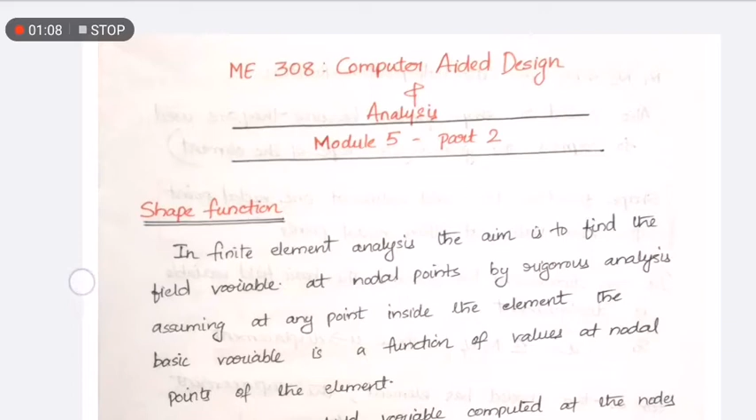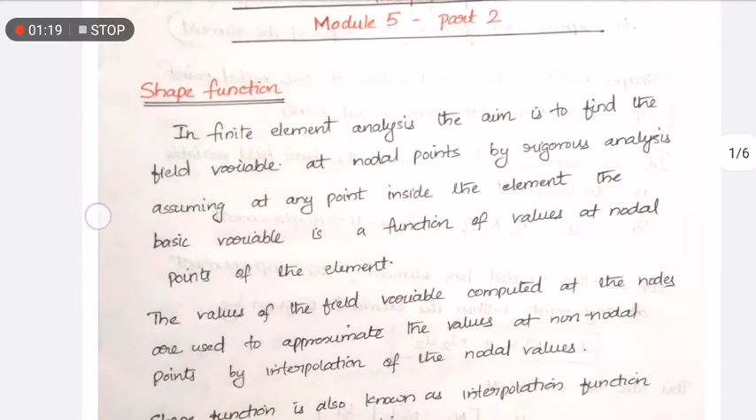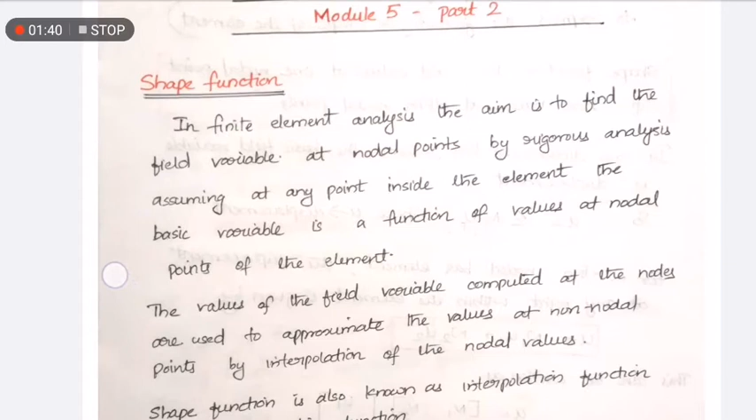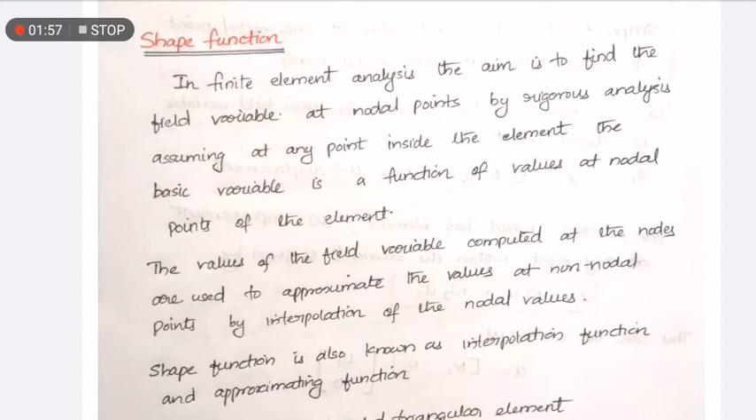Let's see in a formal way what a shape function is. In finite element analysis, the aim is to find the field variable at nodal points by rigorous analysis, assuming that at any point inside the element, the basic variable is a function of the values at the nodal points of the element. That is, the function which relates the field variable at any point within the element to the field variable at the nodal points of the element is called the shape function. In a clearer way, the values of the field variable computed at the nodes are used to approximate values at non-nodal points by interpolation of the nodal values. This function is called the shape function. It is also known as the interpolation function and approximating function.

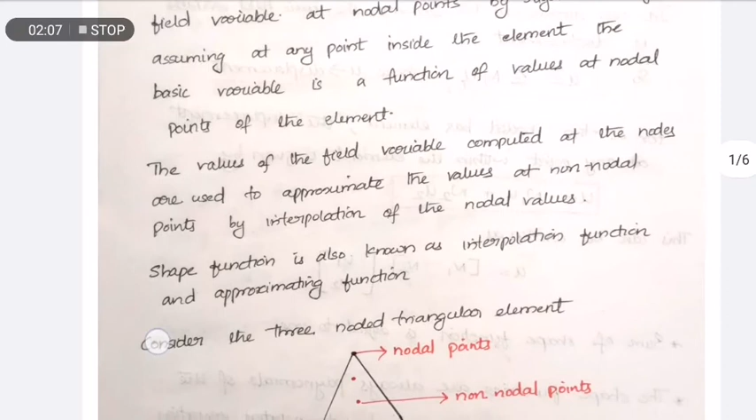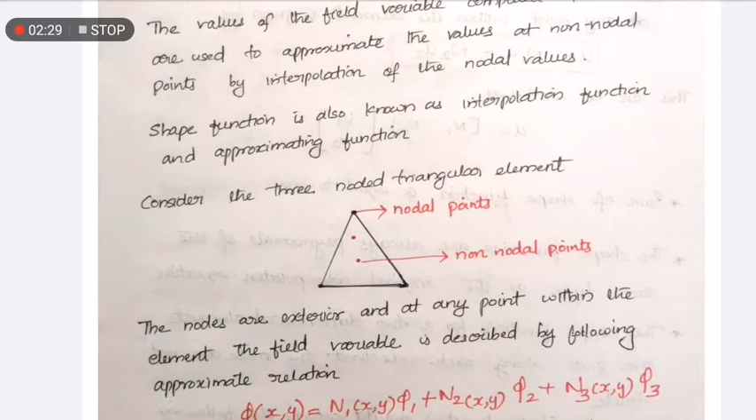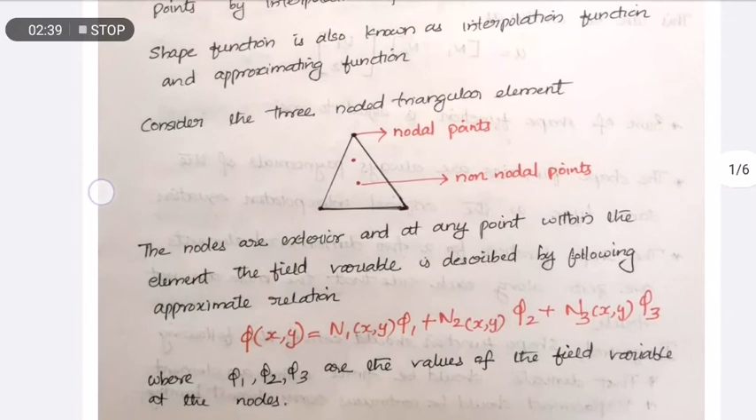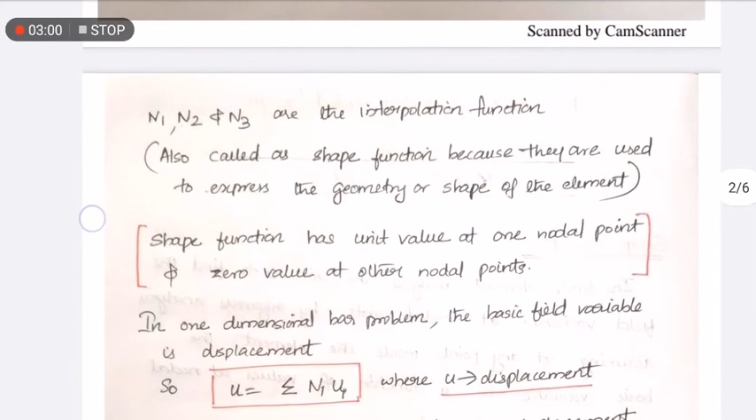Let's see a three-noded triangular element. I have marked the nodal points and non-nodal points. Since it is a triangular element, there are three node points, and there are non-nodal points inside the element. At any point within the element, the field variable is described by the following approximate relation, which is the relation of the shape function: phi(x,y) = N1 phi1 + N2 phi2 + N3 phi3, where phi1, phi2 and phi3 are the values of the field variable at the nodes, and N1, N2, N3 are the interpolation functions. This interpolation function is also called the shape function because it is used to express the geometry or shape of the element.

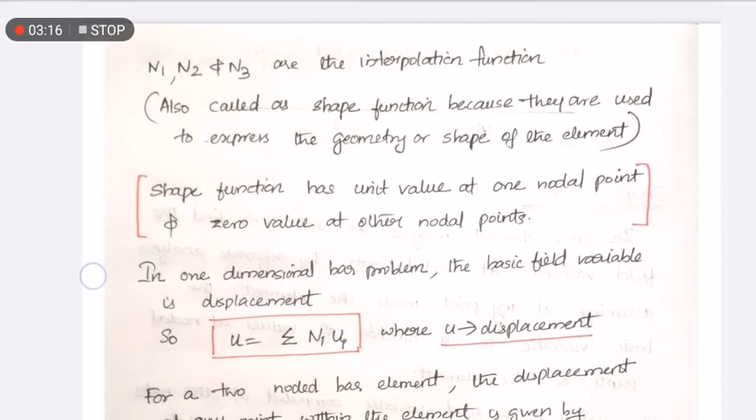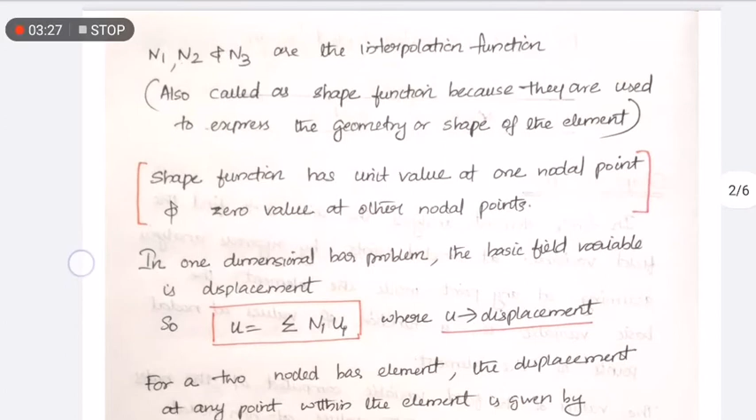One of the main characteristics of the shape function is that it has unit value at one nodal point and zero value at the other nodal points. So a single shape function will have unit value at one nodal point and zero value at the other nodal points.

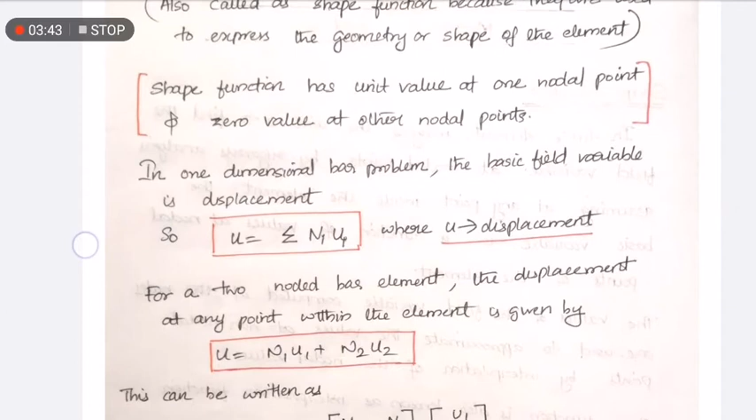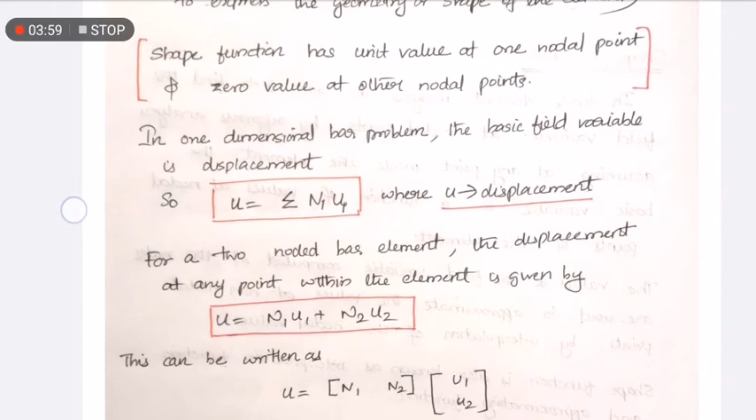When we consider a one-dimensional bar problem, you can write the basic field variable as displacement. When you consider a two-noded bar element, a bar having two nodes, the displacement at any point within the element is given by u = N1 u1 + N2 u2, where N1 and N2 are the shape functions and u1 and u2 are the displacements at the nodes. This can be written in matrix form as u = [N1 N2] {u1 u2}, where one is a row matrix and the other is a column matrix.

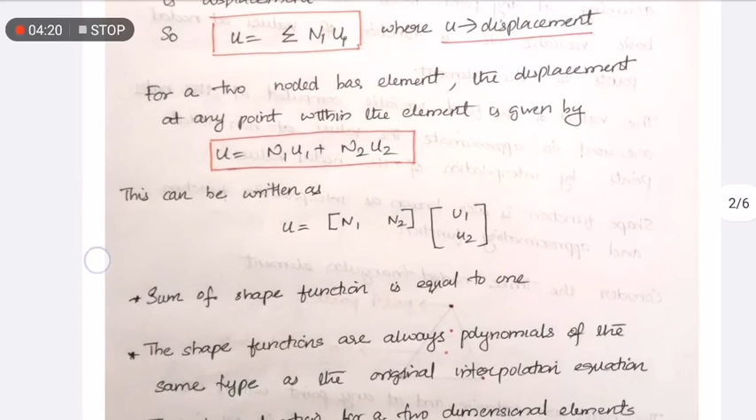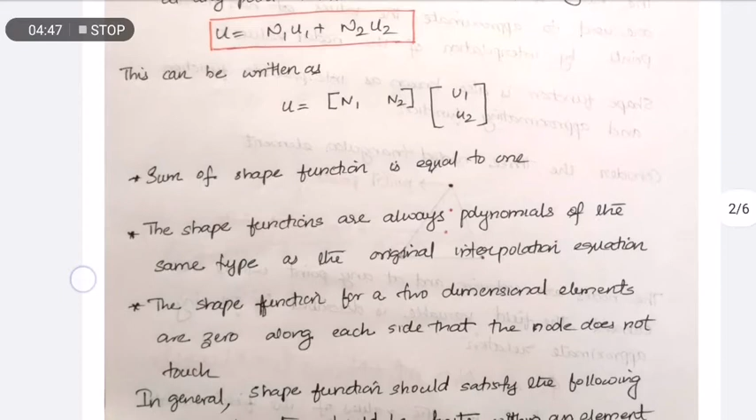Another characteristic of shape functions is that the sum of the shape functions is equal to 1, and the shape functions are always polynomials of the same type as the original interpolation equation. Why polynomials? Polynomials are quite easy for differentiation and integration, and it is easy to formulate and computerize the finite element equations.

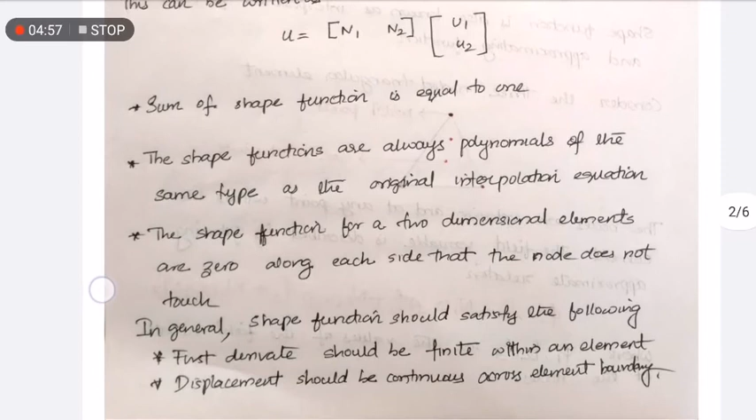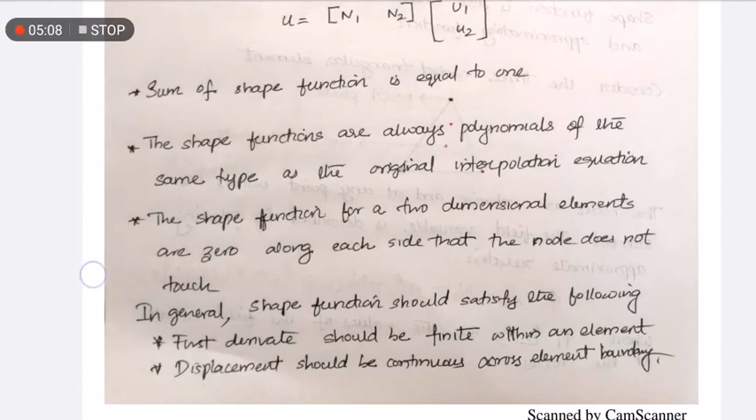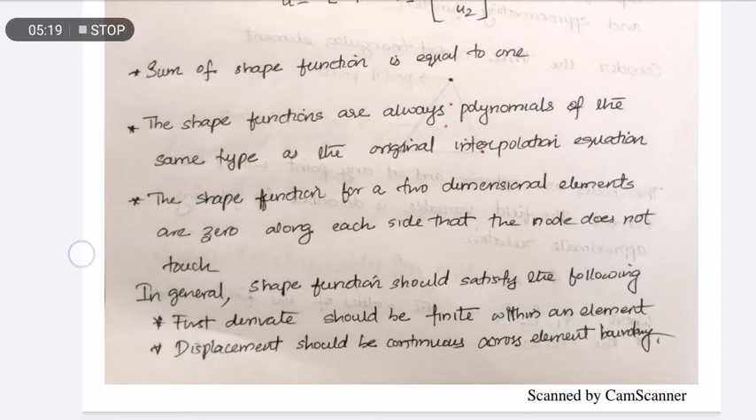In general, shape functions should satisfy the following: the first derivative should be finite within an element, and displacement should be continuous across the element boundary. These are the shape function characteristics. And one more: the shape functions for two-dimensional elements are zero along each side that the node does not touch. So this is the basic of the shape function.

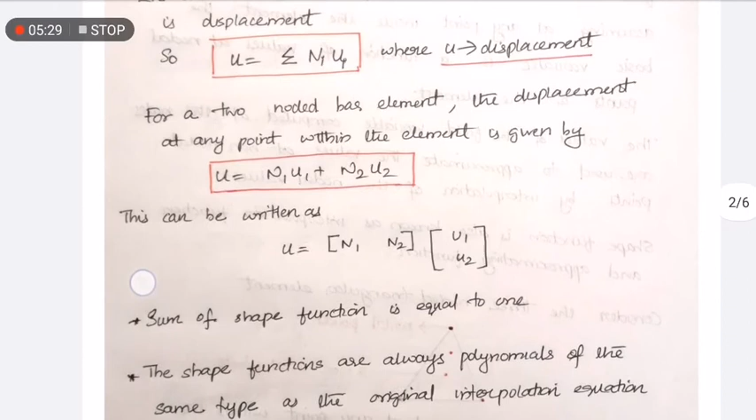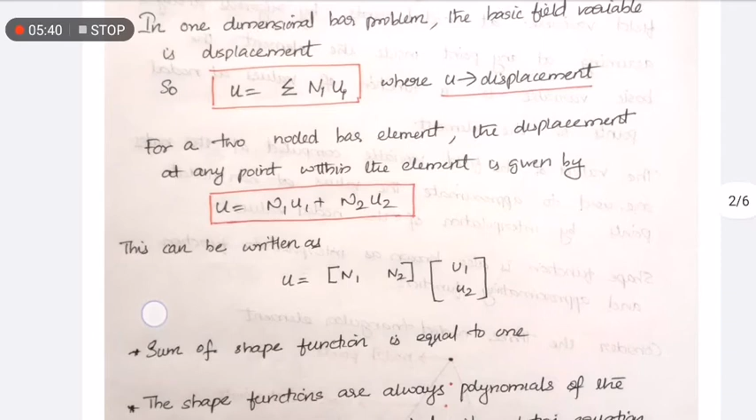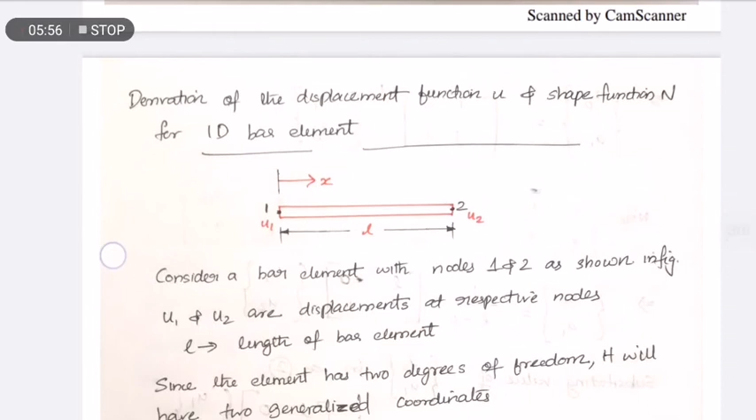For a two-noded bar element, the shape function equation will be u = N1 u1 + N2 u2. Here, for a one-dimensional bar problem, the basic field variable will be displacement. Let's see the derivation of the displacement function u and shape function N for a one-dimensional bar element. You can see a one-dimensional bar element having two nodes 1 and 2, the bar length is L, and u1 and u2 are the respective displacements at nodes 1 and 2.

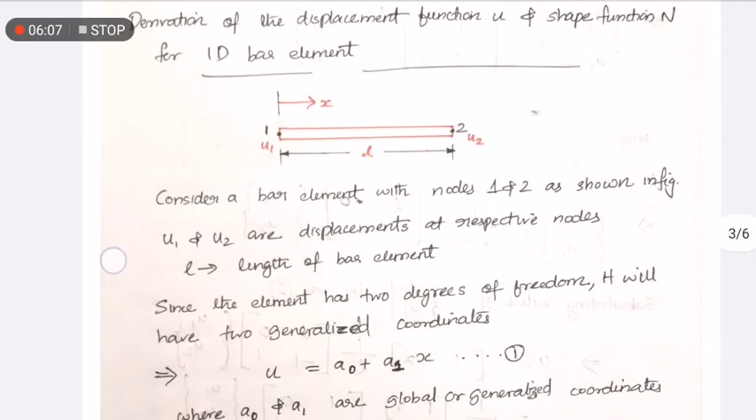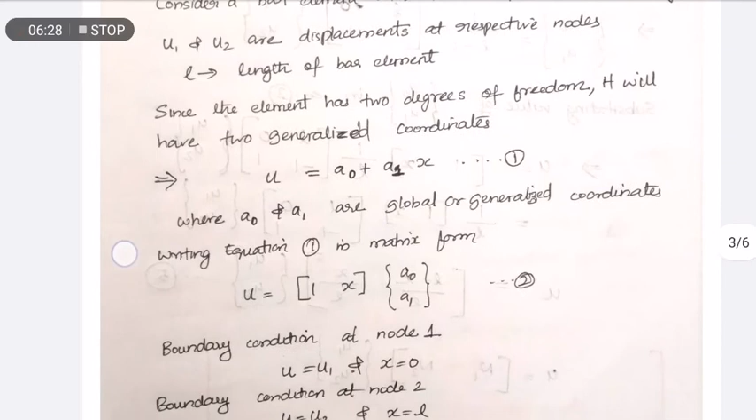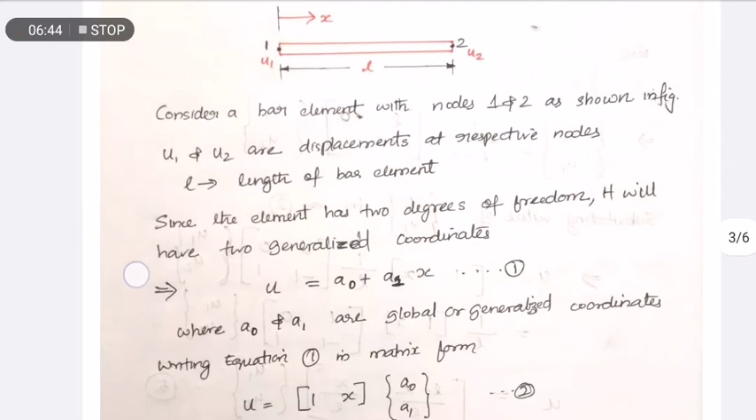Since the element has 2 degrees of freedom, it will have two generalized coordinates. So you can write u = a0 + a1 x generally, where a0 and a1 are the generalized coordinates. We can write it in matrix form: u = [1 x] {a0 a1}. After writing it like that, we will apply the boundary conditions. At node 1, you can see u = u1 and x = 0.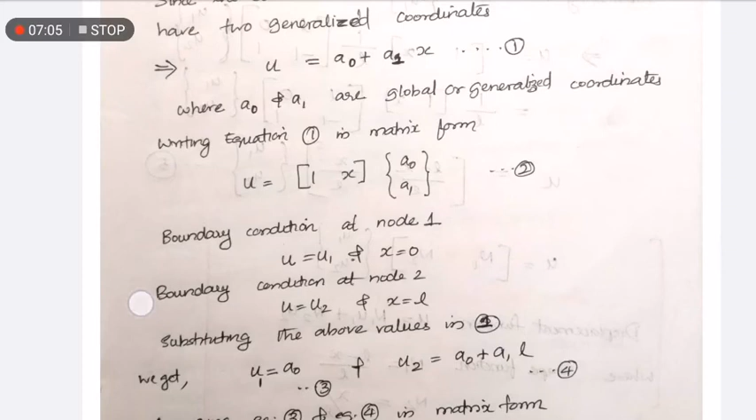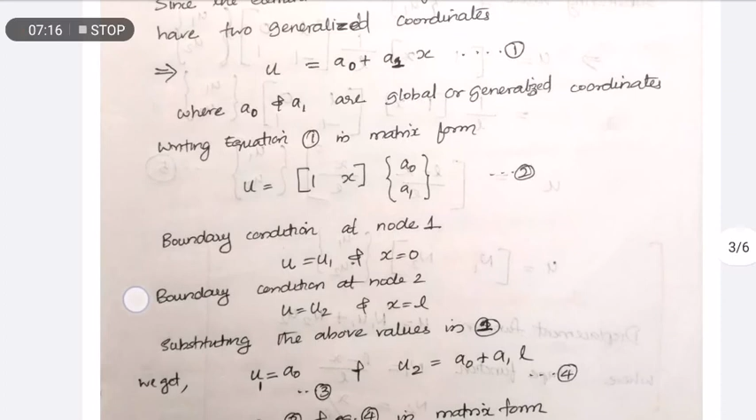At node 2, the boundary condition is that u is equal to u2 at x is equal to L. Why x is equal to L? Because L is the total length of the bar element. So substituting the above values in equation 1, u is equal to a0 plus a1x, we will substitute these boundary conditions and write it in matrix form.

We will write it in a matrix form. u1, u2, a column matrix, is equal to one row matrix into another column matrix: 1 1 0 L is a row matrix and the other is a column matrix. So rearranging for a0, a1, you can get the equation like this. One column matrix and the other one is a row matrix. So the row matrix is inverted. So there is an equation to note.

The inverse of the matrix of a11, a12, a21, a22 elements is equal to 1 by a11 a22 minus a12 a21, into the matrix of a22, minus a12, minus a21, a11. Applying this equation, we can reduce it to the equation a0, a1 is equal to 1 by L, the matrix, into the column matrix. Substituting this value of a0 and a1 in equation 2, that is the matrix form equation 2, and when we reduce that equation,

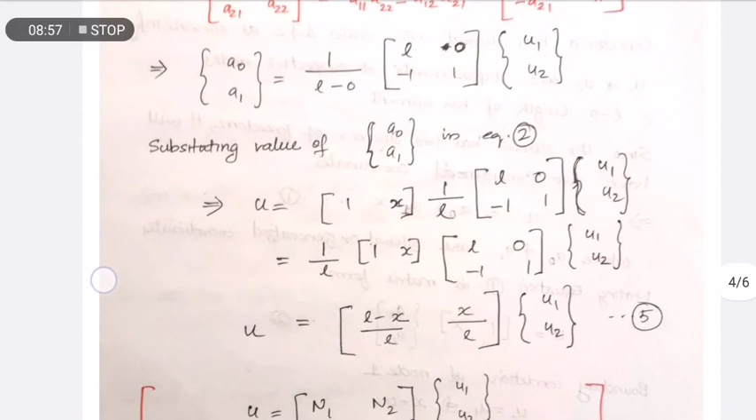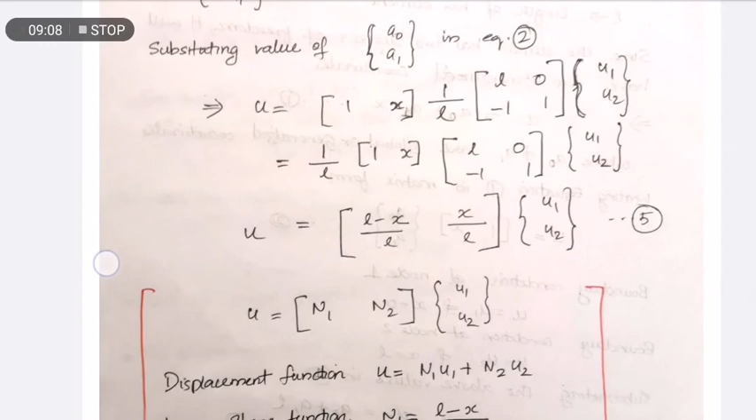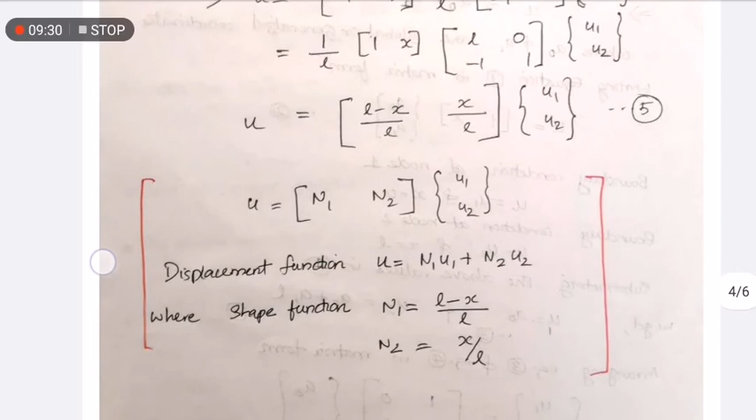we will get u is equal to the matrix with L minus x by L as one element and x by L as the other element, and the other column matrix u1 and u2. So we can say that the displacement function for a two-noded one-dimensional bar element is u is equal to n1 u1 plus n2 u2, where shape function n1 is L minus x by L and n2 is x by L. This is the derivation for the one-dimensional bar element displacement function and shape function.

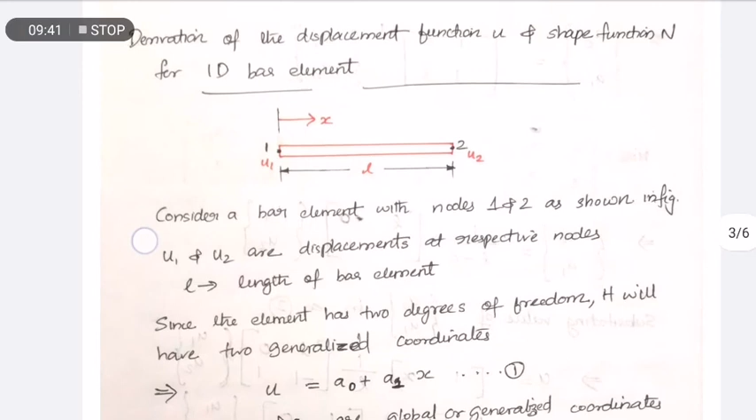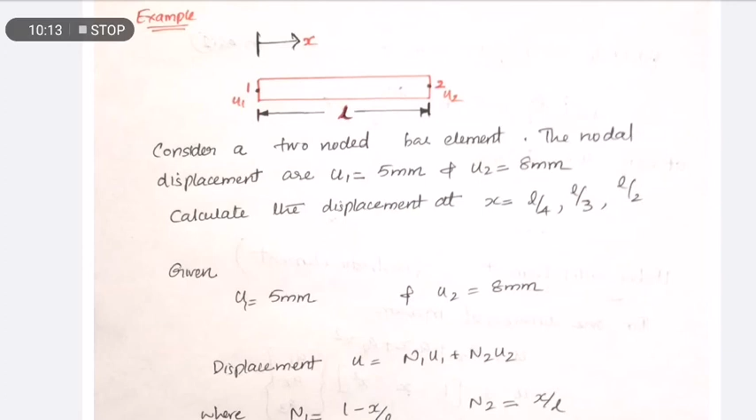So let's see a simple problem related to this shape function. Consider a two-noded bar element. The nodal displacements are u1 is 5 mm and u2 is 8 mm. Calculate the displacement at x is equal to L by 4, L by 3 and L by 2. So there are two nodes 1 and 2. The respective displacements are u1 and u2. The field variables at the nodes are u1 and u2. So we have to find the displacement at non-nodal points L by 4, L by 3, L by 2.

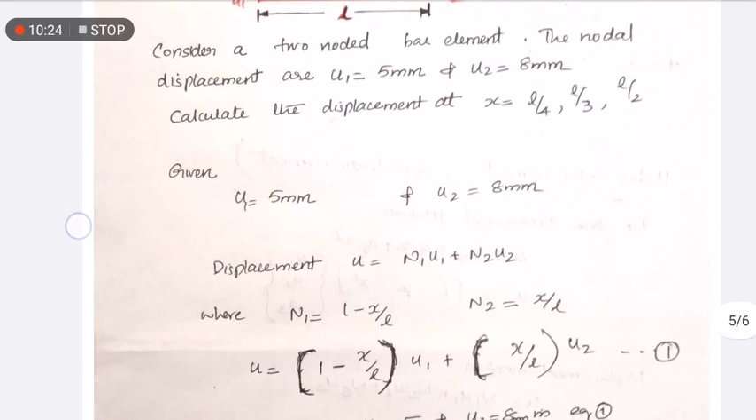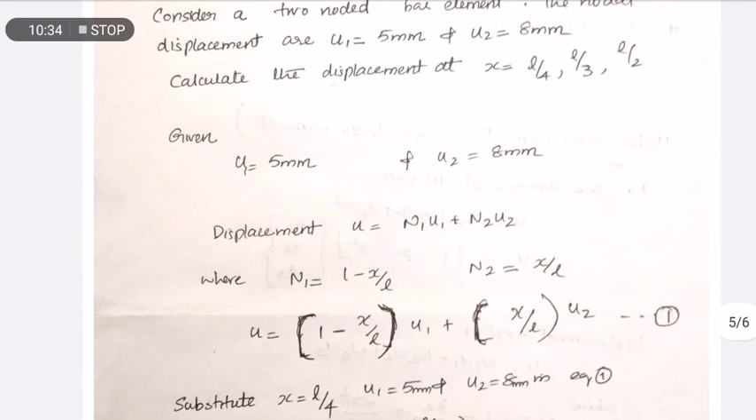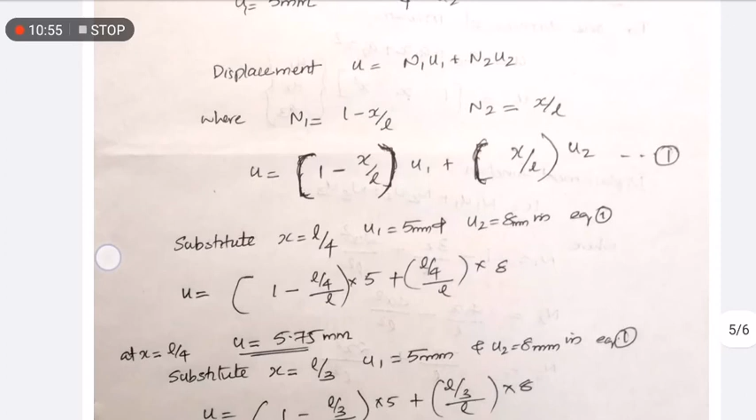Okay. So we will use the equation u is equal to n1 u1 plus n2 u2. And we know that n1 is 1 minus x by L and n2 is x by L. Simply substituting the x value, u1 and u2 values, you will get the answer. For one example, at x is equal to L by 4, we will substitute u1 is equal to 5 and u2 is equal to 8. Then u is equal to n1 u1 plus n2 u2. We will directly get the answer u is equal to 5.75. Similarly for x is equal to L by 3 and x is equal to L by 2. These types of simple problems may be asked for 2 to 3 marks.

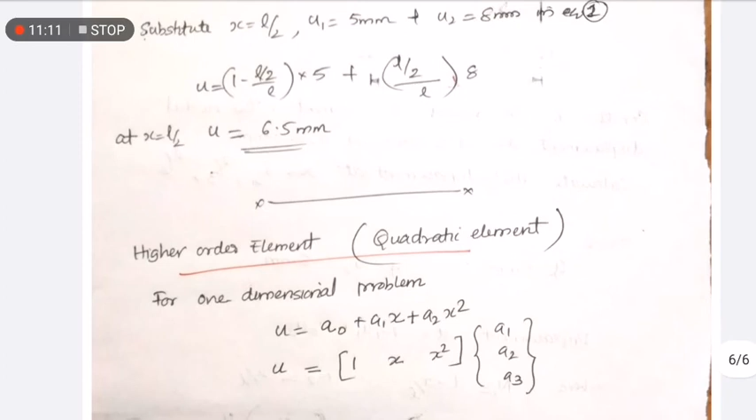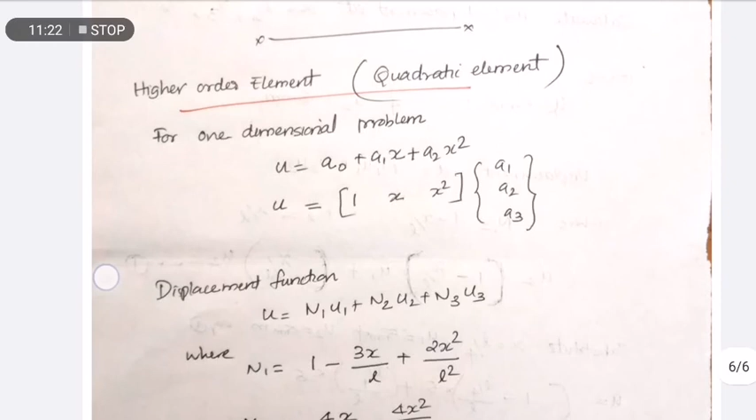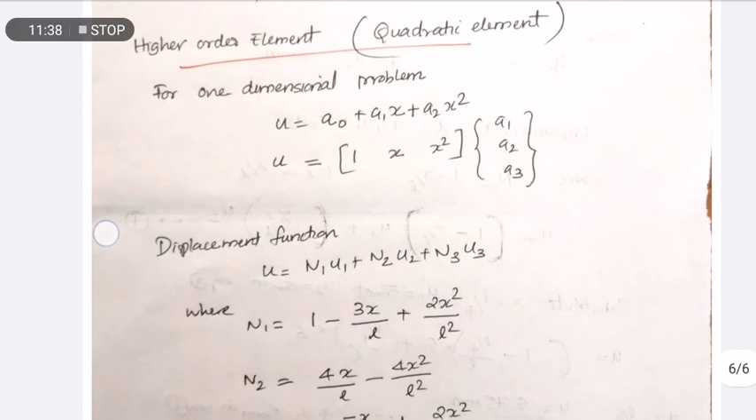And when we consider a higher order element, for the one-dimensional bar problem only, a quadratic element, we can write u is equal to a0 plus a1x plus a2x square. So the displacement function will be u is equal to n1 u1 plus n2 u2 plus n3 u3. As we discussed, in a similar way you can derive it and you will get the n1, n2 and n3 values. That is, n1, n2, n3 are the shape functions and u1, u2, u3 are the field variables, that is the displacements at 3 nodes. Okay.

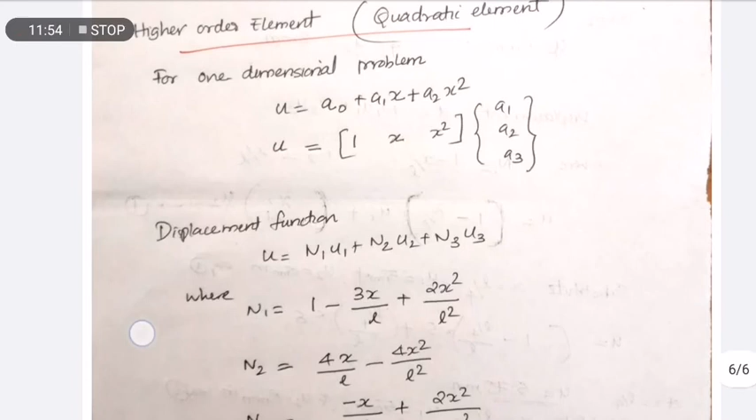Hope you all understand what is shape function, what are the characteristics of shape function, how to derive the shape function for a one-dimensional bar element, and a problem related to this shape function. This is a simple topic. You all should study this topic.